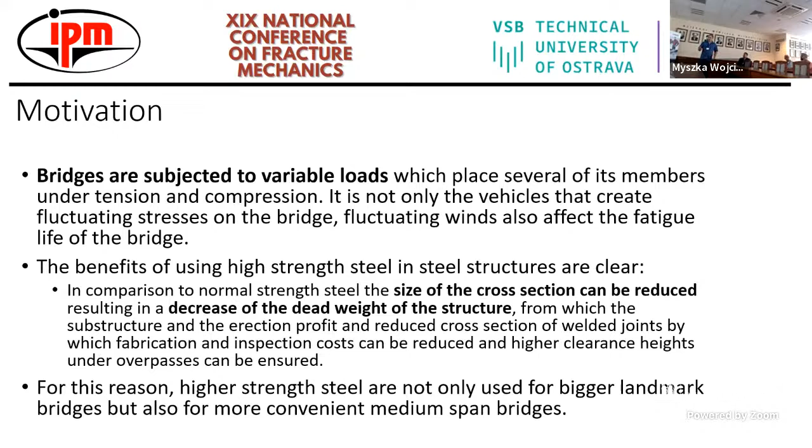If we use both in combination, it means that we need some fatigue measurement, and then we prepare, according to this measurement, some recommendation on how to use this high strength steel. Therefore, our aim is firstly to introduce shortly the material properties, weaker toughness or Vickers hardness, S-N curve, compare and discuss the results, and then later we add some corrosion effect.

One more, please. Should work.

Now, the chemical composition, it is quite easy. It is given by the producer of the steel, and there is some recommendation up to this value of the chemical composition, and there is information about the real values of the chemical composition in this given steel plate. Then you can see here, only for information, how the grain size is. This is 50 microns, meaning it is standard steel structure.

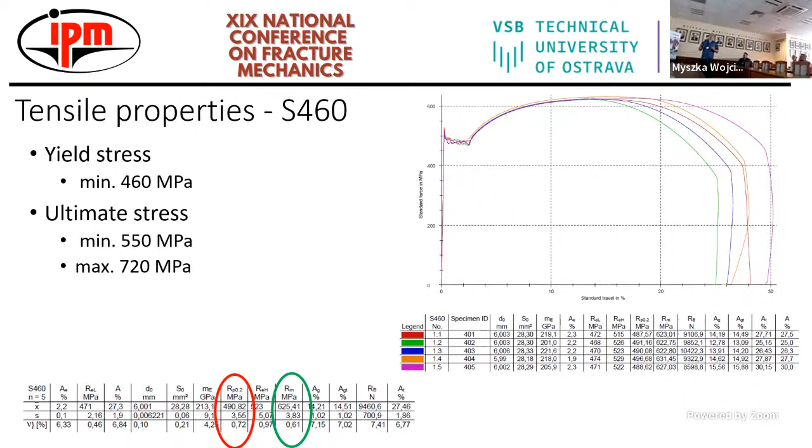Okay, then we move to tensile property. It is according to the norm; we need at least the minimum value of 460. That is the yield stress, and ultimate stress is in this interval. Then you can see the measurement we performed on 5 coupons, and there is information about the average values: 490 and 625. It means that the steel is perfectly in the category of steel 460.

Then the other step was the measurement of the Vickers hardness. This information is important for us because later we are going to weld this steel 460 together, meaning there will be other areas which are not the pure steel, and we try to measure the values around this welded part. The average of the Vickers hardness was 200, and perpendicular to the surface it was 184.

We move to the next step, the information about the SN curves. All our measurements were performed at stress ratio 0.1, which is an important stress ratio for civil engineering structures. The information is very homogeneous, with an index of dispersion of 0.8, and here you can see the specimen which is unbroken at level 220. According to stress ratio 0.1, the limit for cyclic load is approximately 440 or 450.

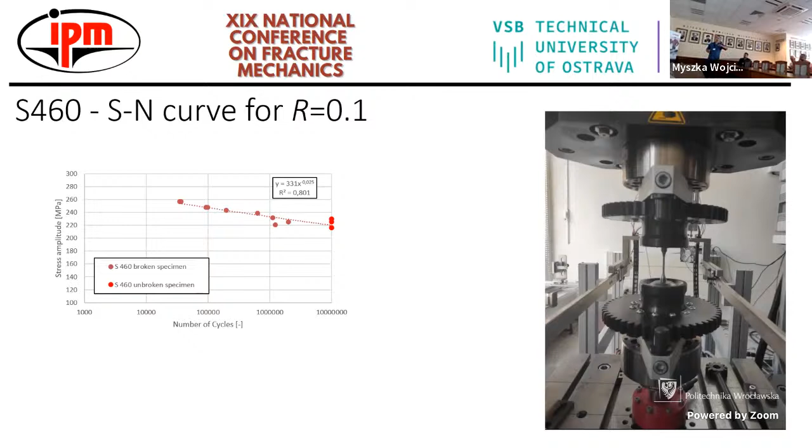Then we move to the specimens prepared from the welded material. You can see the weld given in cross section, and then we cut it. Primary cuts were done in 2 millimeters for the SN curve to obtain information about fatigue resistance, and 10 millimeters was milled and later polished to obtain the net for the Vickers measurement.

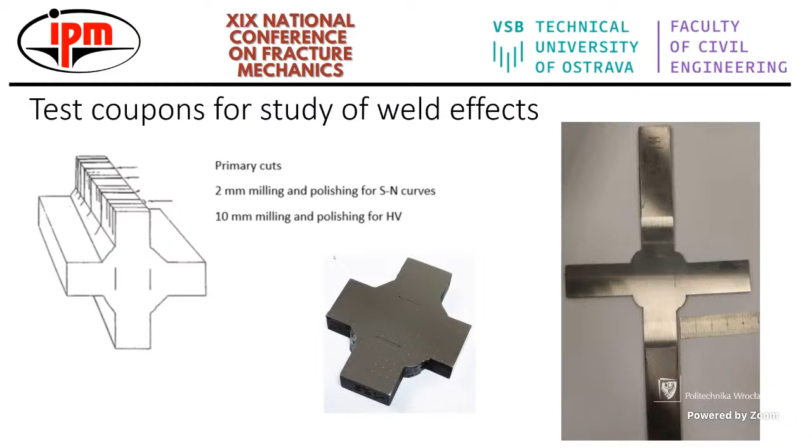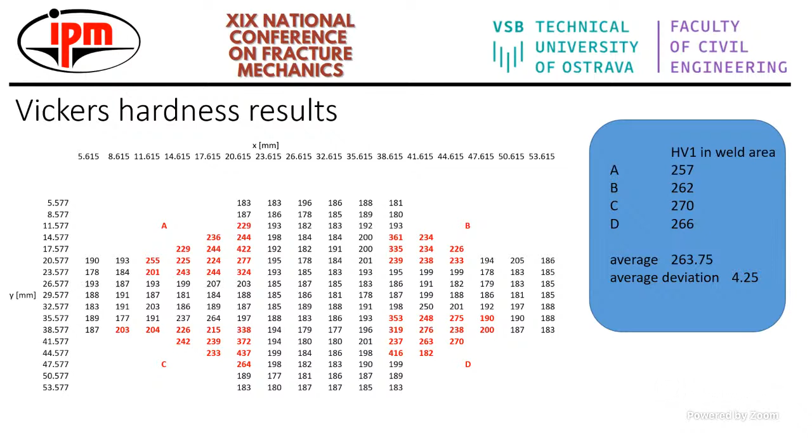Now the net is given here, and you can see these 4 corners from the measurement. I used red color to mark the part of the specimen that was under the weld area, labeled A, B, C, D. From this you obtain the average values in these areas and the overall average value for all welded parts.

Then we move to important results performed on these joints, and now you can see 3 results. The first is well known from the circular specimen. Then we prepared the measurement in the plate, and then the plate with weld joints. Each geometry changes the fatigue behavior of the material.

Especially when we see the endurance limits, which is at 1 × 10⁷ cycles. You can also see that all points, as we approach the static test, are aiming toward point 131.

Before we prepared the test, we looked in the literature to see if this effect is described. We found that it's already best described on the steel BS 4360, and you can see that the pure specimen is really shifted compared to the specimen with the cruciform joints.

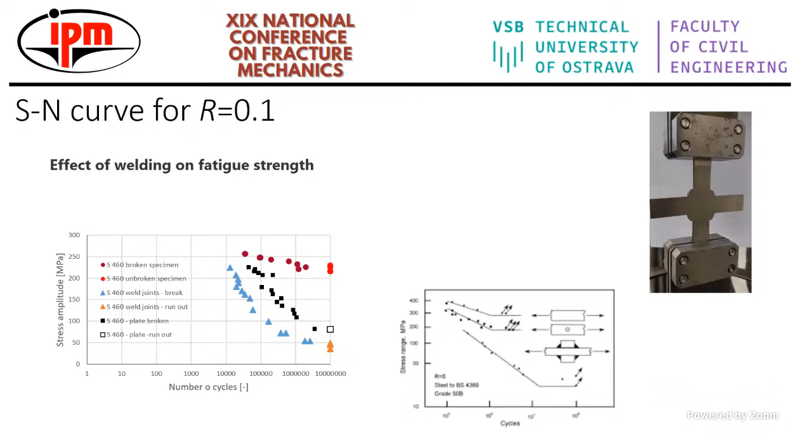Then, as you saw the results, we had to quantify them. The first method is very easy, using the Basquin model, so it wasn't necessary to show it. Theoretically it's good to show it in log scale, but in my case I used log information on the x-axis and the standard semi-logarithmic axis for comparison of the results.

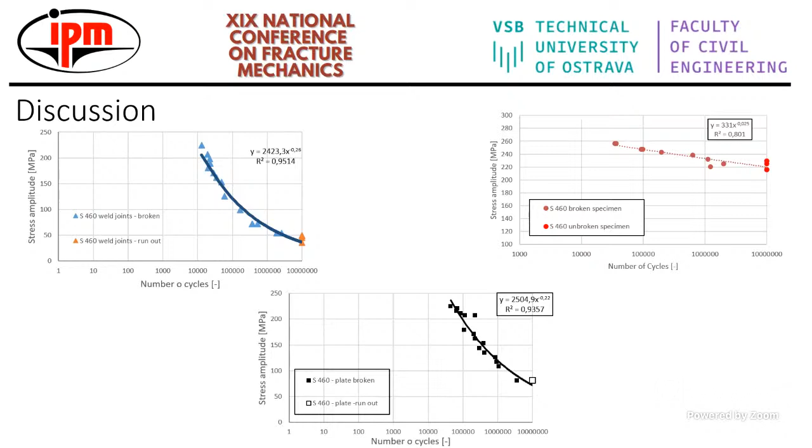You can see that when we use the cruciform or the plate, the index of dispersion is almost better than for the pure material. I suppose this is because it is initiated from the same defect, and also the plate's crack initiates at the surface corner, where the stress is at a higher level than in the middle, where there is no typical stress concentrator.

Then we looked at how crack initiation happened, and we found it occurs as we supposed and as known from the literature, coming from the weld toe. You can see the red rings marking this, always over the weld part.

Then the other step of our research was to control what happens when we expose this steel to corrosion. We prepared the experimental campaign for 3, 6, and formally 9 days — 6 days in the chamber at 45 degrees and 3 days in the chamber at 50 degrees Celsius. The fourth set is from the roof exposure sample, which stayed on the roof for 1 year.

Okay, you can see the chamber for the corrosion, and how we tested these samples. These samples, you can see here, this 5, it is one clear specimen, and each one with a different corrosion effect. Then also for stress ratio 0.1, and then we started the test.

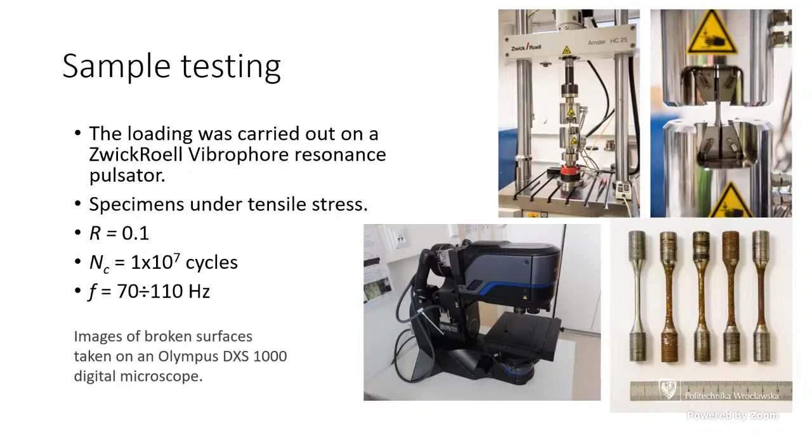After this test, we also used the Basquin model for evaluation, or an extended one, the Castillo-Canteli model, because we would like to know not only the probability of rupture of the specimen at 50%, but at 0.05 or 0.95, and if we are able to calculate the probability of rupture at 0 level.

Okay, you can see the first one. The Basquin model, it is quite clear. Applied, and then the problematic part of the Canteli model is that it is described as hyperbolic, almost hyperbolic.

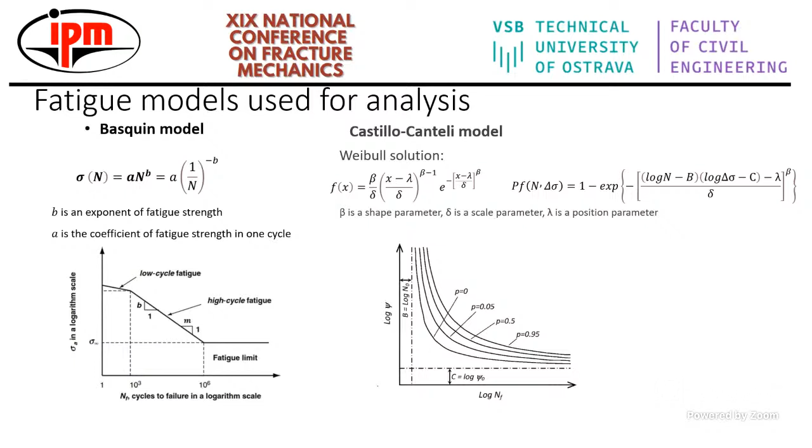This means that according to the rules, we started evaluating for Basquin from 10,000 cycles. Also we need to start for the Castillo-Canteli model. Okay, this is the reference one, and then the comparison of all 4 situations after the exposure in the chamber.

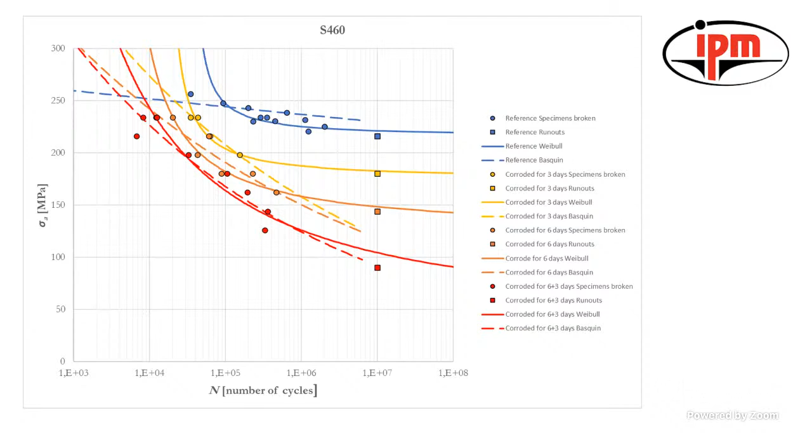Okay, you can see 3 days. Then, as we supposed, 6 days and 9 days. Then we added the corrosion effect after 1 year on the roof.

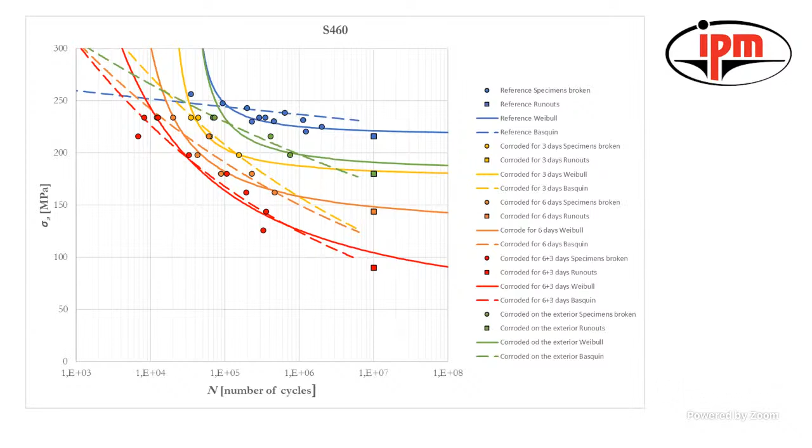You can see that this is between the clear specimen and up to 3 days. It means that if we wanted to simulate the situation in the Czech Republic with the high strength steel corrosion effect, it is clear that we could use 3 days as approximately 1 year of corrosion, or less than 3 days.

Then for 9 days it is 30% down, but here it is 50%. And as we saw before, for the roof it is in this position, the green one. Also you can see there is only 5% or 10% degradation for the endurance limit.

Okay, then we look at what happened on the surface. Because we suppose that the corrosion effect is on the surface, it means the crack surely starts from the surface. As you see, this is the reference one, theoretically without the crack prepared by corrosion. Then from the exterior, because it's the second one, which follows the corrosion.

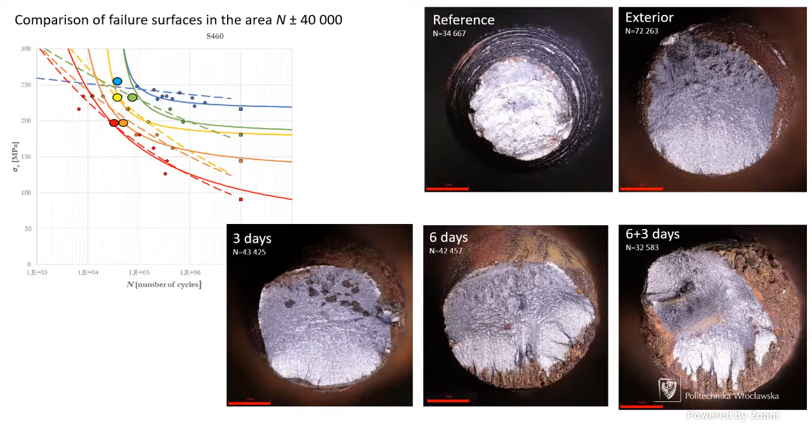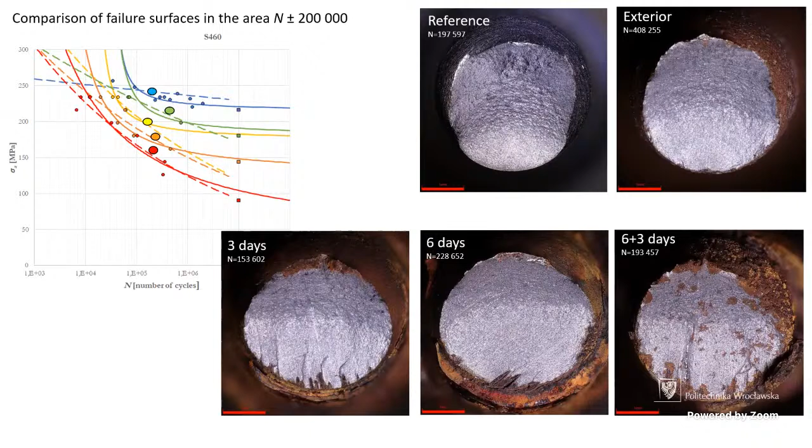And you can see the points taken from this measurement. What is this for 200,000 cycles? Also you see here the crack propagates formally up to brittle rupture, and then you see that the corrosion goes deeper inside during these additional days.

And the last two slides show us the reference one, the exterior, and 6 days at this level, and then for all we try to finally evaluate.

As I showed you before, the degradation in bearing capacity due to corrosion is clearly visible. It is from the results, quite clear. You can see the degradation due to the corrosion, and it is quite clear that the corrosion influences the fatigue properties.

And if we would like to combine this with some welded specimens, it means we have to take together at least 2 effects, one for corrosion and one for weld. And surely the properties will be, I suppose, the third one.

But we just prepared the specimen. You can see one of them for the testing, but we didn't test it yet.

But I think that it is the last one, which we are going to prepare during 1 month, and we will finish all our experimental campaign for this high strength steel S460, and we will be able to quantify not only the effect of the weld, but also the effect of the weld together with the effect of the corrosion.

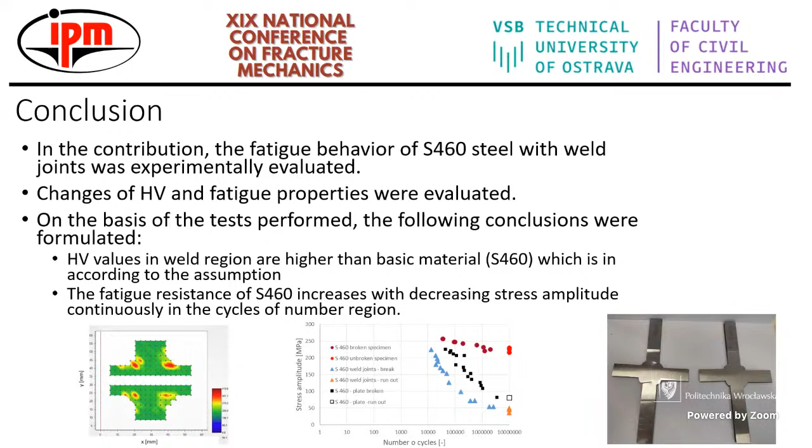It is a very difficult question, but thank you for this. I think for quantification, because you never know how long the bridge is influenced by corrosion... as you see here, after we apply the corrosion effect, we try 3, 6, and 9 days, and you can see it will affect, especially the endurance limit. We surely try to find some advanced description of how the properties change due to corrosion, and we try to use some function to predict in the future how it changes the properties.

But is it better to measure the properties after 3 days? We also know that when we take it out, we immediately start the measurement, so it's not exactly 3 days, because if we perform the test a month later, surely the corrosion effect continues inside. So if you do it during this corrosion effect, I don't know what the added value will be.

If you wanted to look at when the crack will be better, for example if some oxidative crack could be more quick or retard, or generally speaking in propagation - there is not this effect case, because we suppose that using this, only initiation is enough.

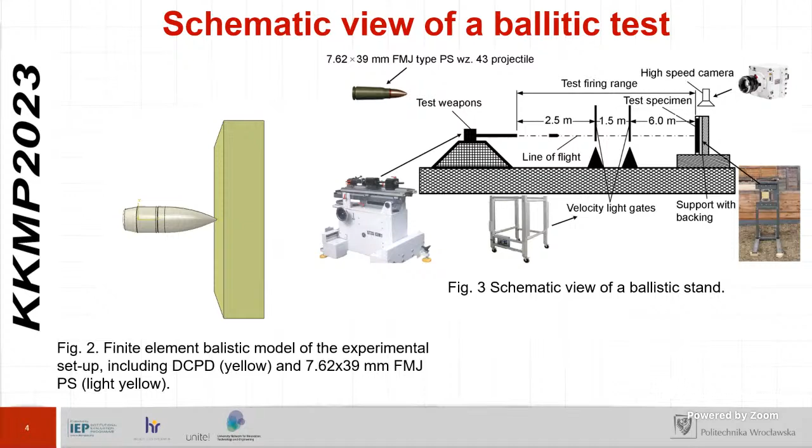This bullet is made of 3 components: the core, the filler, and the jacket. The jacket is made of brass, the filler is made of lead, and the core is made of steel material. So if we have a core made of steel versus one made of lead, you can expect the damage the steel core causes compared with the lead one. The damage from the steel core is so huge, and that's why I'm considering this one instead of lead, even though my PhD covers both. But for this presentation today, it's strictly steel core.

This is a pictorial view of a DCPD plate that is 5 millimeters. For my research, I consider 50 by 50 millimeter samples made of DCPD, and I consider different thicknesses like 5, 10, and 8 millimeters.

After quasi-static tests, I was able to come up with this constitutive model - the material properties of this DCPD from the Young's modulus to the fracture strain, and this is detailed in the table.

From the test, here is the pictorial view of the test in the laboratory, and here is the 3-point bending test result showing force versus displacement. For the stress-strain information, we have it here, and the fracture strain is about 0.035.

This fracture strain is crucial for me - it's very important information because I need it for the numerical calculation, especially to see how this material actually fractures and turns into particles, like the first lecture we had in the morning about smoothed particle hydrodynamics. It was also considered here.

Before we move forward, let's briefly look at this SEM analysis of the bullet. From this portion that was chosen here, which is the steel core, it looks like this. This is just a slice of the bullet, so when you slice it, you're able to see the core, the filler, and the jacket. Here is the core, the next layer is the lead filler, and this is the jacket.

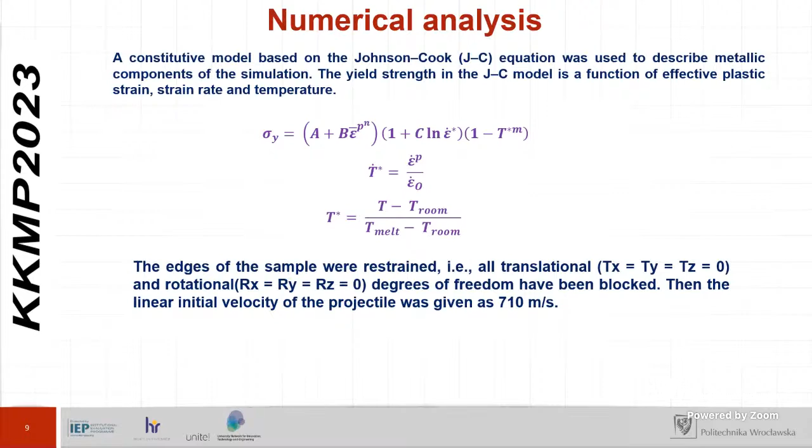I'm going to show you how it actually affects that. So, description of the bullets used for the simulation: we have to check the constitutive model for the bullet itself. This is the steel core, with parameters A, B, M, and N, because we need this information for our numerical calculations. For the lead filler we have this, and for the brass jacket we have this information. This is just the pictorial view showing the outside jacket layer, the filler, and the core, and this is the discretization of the whole bullet.

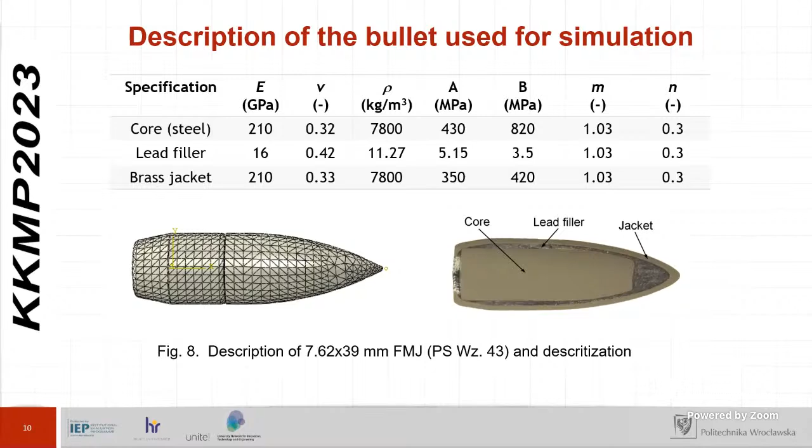Now for the resulting discussion, we can see a complete penetration. This sample, a 5 millimeter thick DCPD plate, is unable to stop this bullet. There was complete penetration, and you can see the material fractured here, with particles visible.

We set this up using the stress-strain information, because we have the fracture strain, so we used the condition of the fracture strain so that whenever it gets to that point, we get this kind of information. This is what it looks like in real life when you shoot it.

So there's full penetration with these bullets at this thickness. This is the side view, and this is the front view, showing the von Mises stress information. For the second sample, which is 10 millimeter DCPD, the same thing happened.

However, there is a difference in the size of the damage, the size of the penetration. That's the only difference we observe here. Of course there's complete penetration, which doesn't mean this result is bad; this is what we actually expected, because no one expects a DCPD material to resist that kind of bullet with that impact velocity.

For the bullet itself, it's important to show how the velocity drops with time. The flat region is when the bullet is in the air and has not touched the sample yet. By the time it touched the sample, you can see how the velocity drops until here. In the relationship between velocity and time, when the velocity actually gets to zero, it means the bullet stops - that's the implication. But you can see it's not up to zero here, it's just from 710 up to somewhere around 706. So it means the bullet was still going, but we don't need that information. The information we need is there was a complete penetration, and that's why this velocity drop does not get up to zero level.

And for the kinetic energy of the bullets, it has to look similar, giving us information about the velocity, since there's a direct relationship between the kinetic energy of the bullet and the velocity itself. So the kinetic energy also drops. It starts dropping from the point at which we have contact of the bullet and the sample. It doesn't get to zero, because you start from 1990, a bit more, and the energy of this kind of bullet is about 2,100 joules. But because I used 710 meters per second velocity, I have this. If I use the real impact velocity of this bullet, which is about 730, then by calculation I should have 2,100 joules. So the energy drops until it gets to this place. The implication is, even though this material was not able to resist or stop this bullet, it was able to absorb at least a little of it, and some part was even transferred back to the bullet. So this is what we can see here on this plot.

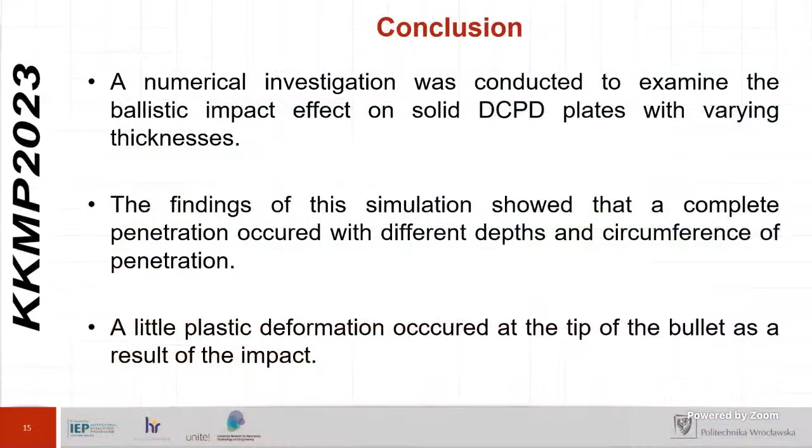Slide number 6, you have the Young modulus is 2.1 gigapascal - is this the Young modulus for the polymer? I think it should be megapascal. Gigapascal? It says 2.1. 2.1 of the polymer, this is DCPD? The Young modulus, yes. This is the Young modulus for this. This is DCPD material? Yes. Just pressed with a very low Young modulus. Yeah, it is low. Yeah. Right, that was it. Thank you. Another question, please.

Actually, I would be interested in what will be the benefit of using DCPD instead of, for instance, epoxy. That would be the first question. And the second one, did you apply any failure criteria for FEA?

Okay, thank you for your question. I'll start from the first one: why do we consider this? Like I mentioned in the introduction, this DCPD has never been used, so technically we might be the first to put it on the internet. This is the essence of research, we have to keep finding new things. Another point is from the published work we published a few weeks ago, we actually used this DCPD, and the results show a very good outcome when it comes to ballistic material, especially for the matrix system, far beyond epoxy resin. It was really, really better results. If you don't mind, I can show you this paper and you'll definitely appreciate it.

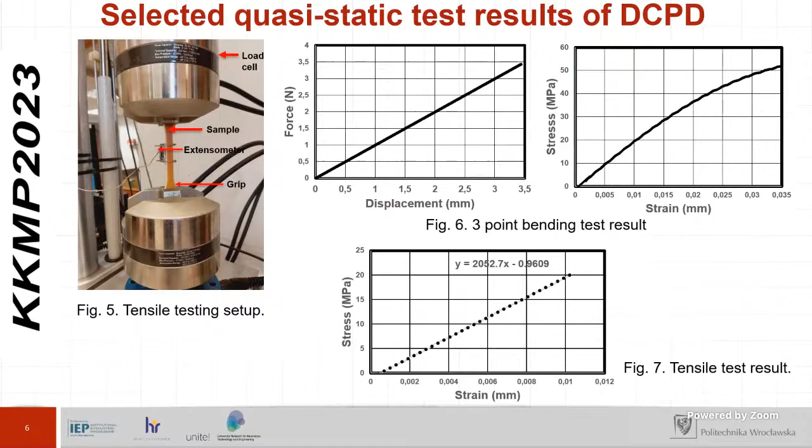Yeah, but you show the failure strain for statics. For static, yes, but you have a dynamic situation. Dynamics is really a complex thing, and sometimes you have to justify the results by considering what we have from quasi-static tests. If we can get the constitutive models from the static results, we can think how this material would behave, even though the conditions aren't really static. But certainly the strain would be lower when it comes to dynamics. How much, I don't know. Maybe it's something I would like to check in the future.

Okay, thank you, thank you very much. More questions? One more, please, Mr. Seidel. Okay.

Okay, Professor. This one? Good. Yeah. Less than one? Yeah.

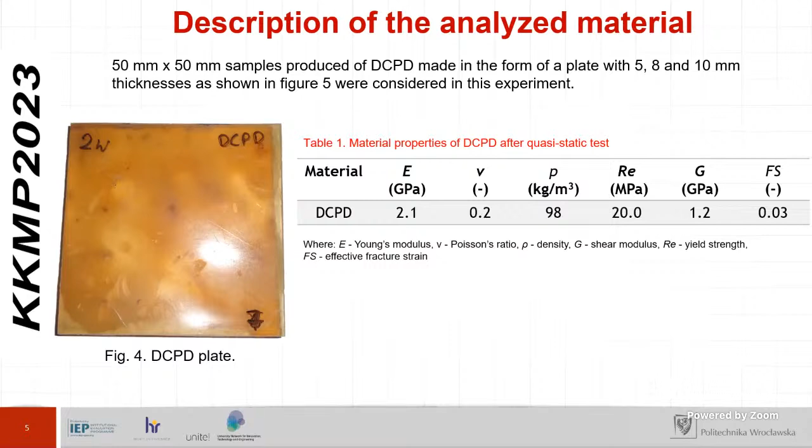Next presentation is again from Wrocław, with several co-authors, Dr. Bem, Kluger, Osiecki, Schubert, and Banasciuti. It's from Opole University. Opole, thank you. Thank you, all of them? Oh yeah, I'm sorry, no, we have cooperation with 3 universities on this paper.

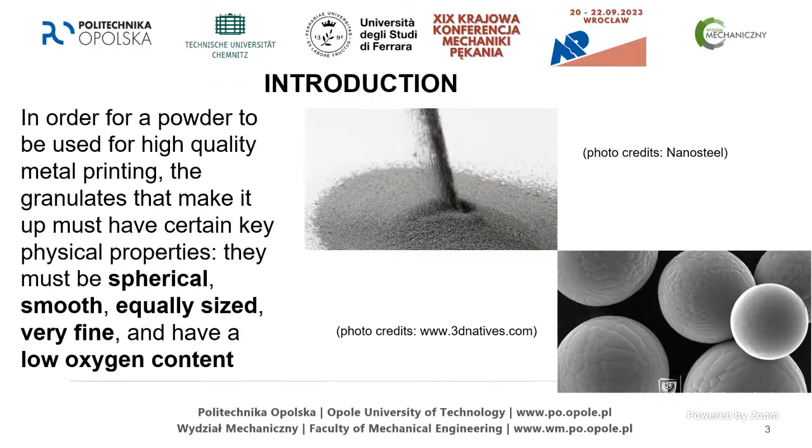We don't want the powder to be trapped inside the element while printing complicated shapes during the process. That is why we need to remove it before closing gaps or voids, as you can see in this picture. So powder removal is actually one of additive manufacturing's dirty secrets, right?

We have many techniques. We don't want to have the powder anywhere. We have vacuum, boiling, we have some ultrasonic techniques which we can apply in order to remove the powder from complicated shapes, spaces, and so on.

So in one of our meetings, because we are printing a lot of things together, we actually discussed... it doesn't do anything.

What will happen if we don't remove the powder during the printing process and leave it in the voids, right? I'm not talking about the pores, I'm talking about voids - the spaces that have been created according to some complicated structures and so on.

There have been some papers on fatigue in terms of powder contamination of the structure of the samples, of the influence of different pores. But what happens if we just leave this inside the void? How would this influence the fatigue properties of a printed element?

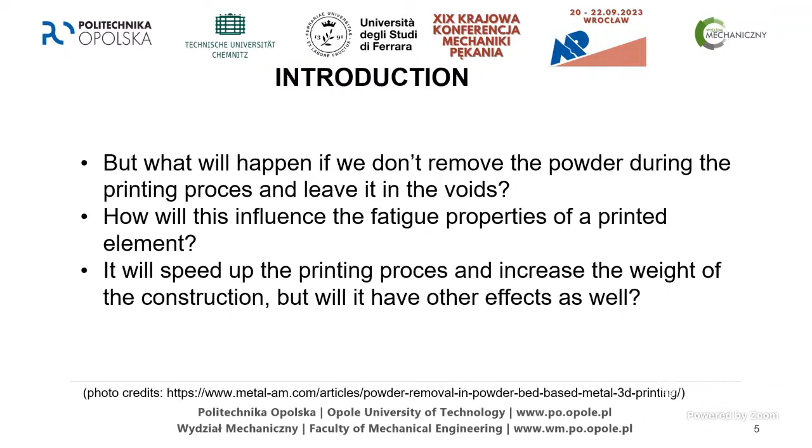It will speed up the printing process because we don't have to stop the process. We don't have to blow out the powder, right? And it will increase the weight of the construction, but will it have other effects as well.

So in order to try to answer these questions, the authors have performed experimental fatigue tests of 3D printed specimens. The goal of this paper is to test fatigue specimens with powder trapped inside a pre-designed void, in the shape of a sphere, under constant amplitude bending.

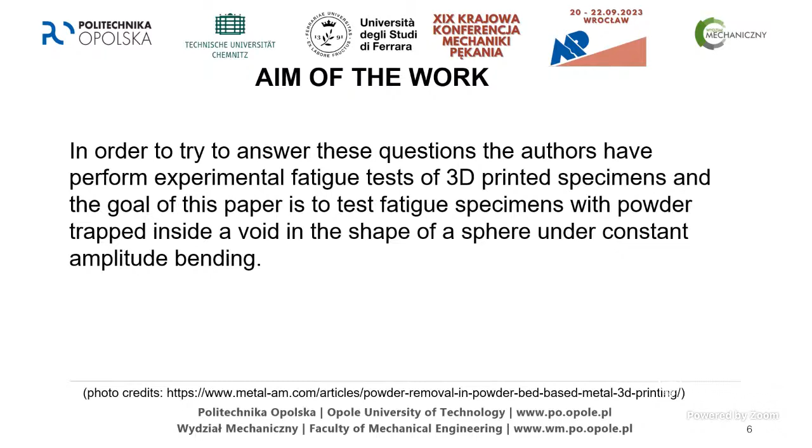So we designed a 3D model, we designed a sphere, but whether it's going to be a sphere or not we will see after the printing process, because the printer also has its own capabilities.

So the material that we have chosen for this is titanium - aluminium, vanadium, grade 5. It is comprised of 90% titanium, 6% aluminium, and 4% vanadium. The positive aspects of this material are its high corrosion resistance, high tensile strength, light weight, low density, heat treatability, easy weldability and fabricability, and excellent biocompatibility. It's non-magnetic. It has some disadvantages as well, such as poor shear strength and being corrosive to strong acids.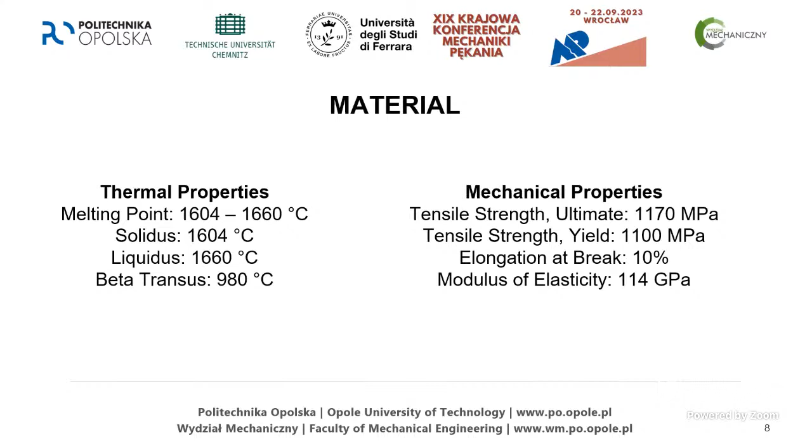The mechanical properties - we can see high ultimate strength, tensile strength, yield, elongation at break - and the modulus of elasticity is not bad for a material like this.

The samples, or specimens, that we have used - as you can see, the upper one on the left is the full fatigue specimen that we normally use for fatigue tests at the Opole University of Technology. It is called the Diabolo specimen. On the right side we have the tensile specimen that was used, which our partners wanted to use during the test. And on the lower left corner we have the fatigue specimen with the spheric void.

So we actually have two types of fatigue specimens in doing these tests: we are testing the full fatigue specimens printed, with no voids inside, and we have the fatigue specimens with the spheric void inside that is filled up with the powder. We are not stopping the process, we are not blowing out the powder, we are just leaving it there. We want to see how it will influence the fatigue properties. And the fatigue properties, in my aspect, we want to check up to the moment where we have the initiation of the crack - we are not discussing the propagation of the crack in this paper.

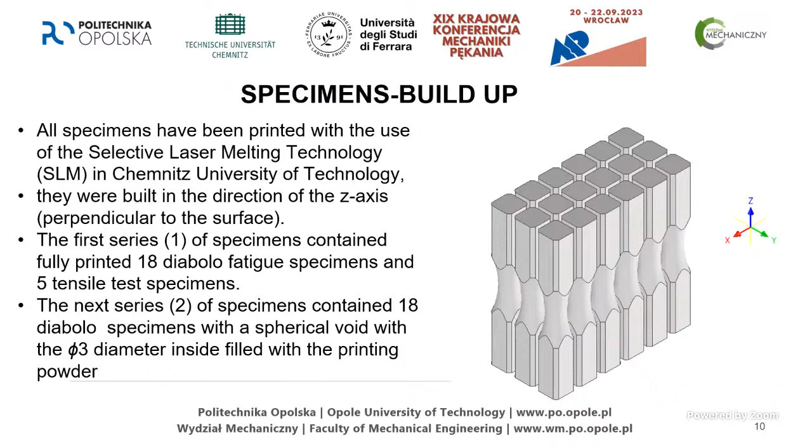So as for the buildup, we had two sets of fatigue specimens and one set of tensile specimens. In the first round, all of these tests have been built - the specimens have been built in the direction of the z-axis, as you can see on the right side. The diameter was 3 for the spherical void specimens. This is how we got the specimens from our partner from Chemnitz.

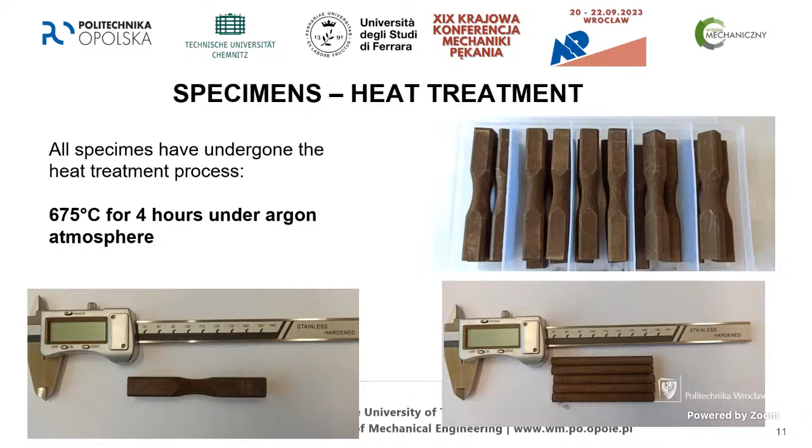The specimens have also been heat treated at 675 degrees Celsius for 4 hours under argon atmosphere, and then we have also machined them, because we want to highlight the aspect - if there is one to be found - when it comes to the void. Normally we could test the samples as they have been printed, but usually there are too many disadvantages in terms of the roughness of the surface, so it wouldn't show a clear result in these terms. So we have machined the specimens, and we have also machined the specimens for the tensile tests.

It's good that we have the company Lenso, and in a few days there's going to be ZEISS. We used their software during the test because we also performed tomography of all of our samples, using GOM Inspect Pro for that purpose. It's interesting that we met up here.

We could calculate the whole area, all the pores that have been inside the specimens. We have all the data that can be later analyzed. We can create 3D models for the finite element method and so on. So we have all the data. The perfect situation would be like this.

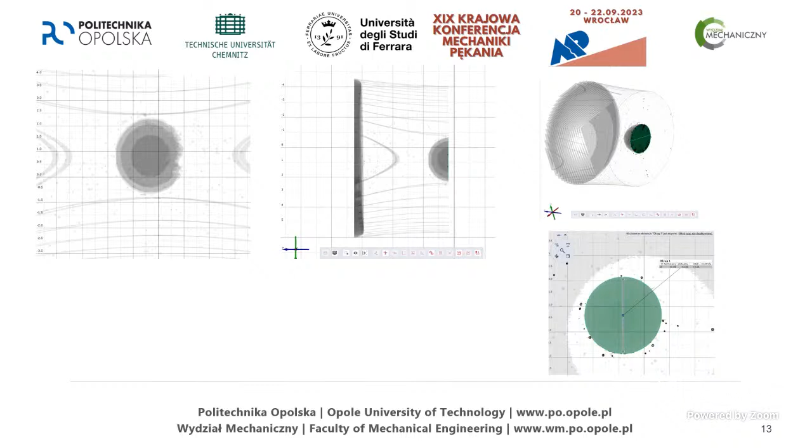If we have the scan of our void like this, nothing beside it - but in some of our specimens we have something like an artifact, presumably caused by a computer failure or something during the printing process. We also measured that area. As you can see, it's enlarged on the right side. We measured it - it's something like a ring element, a little bit coney, like a cone being cut. In some specimens we have this area that may later influence the fatigue tests, as we can assume.

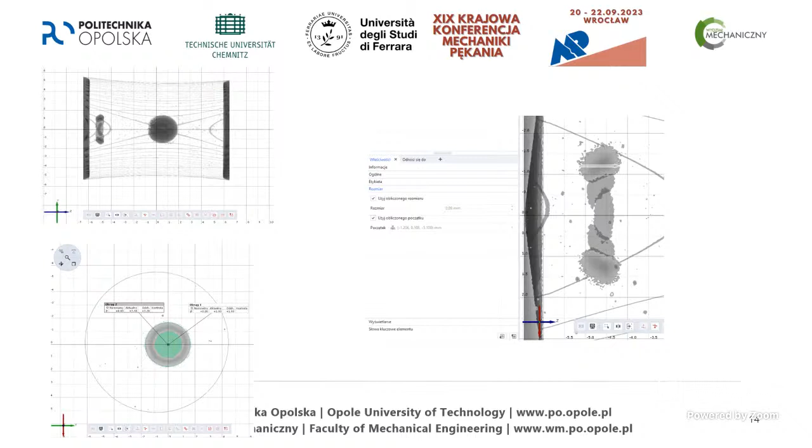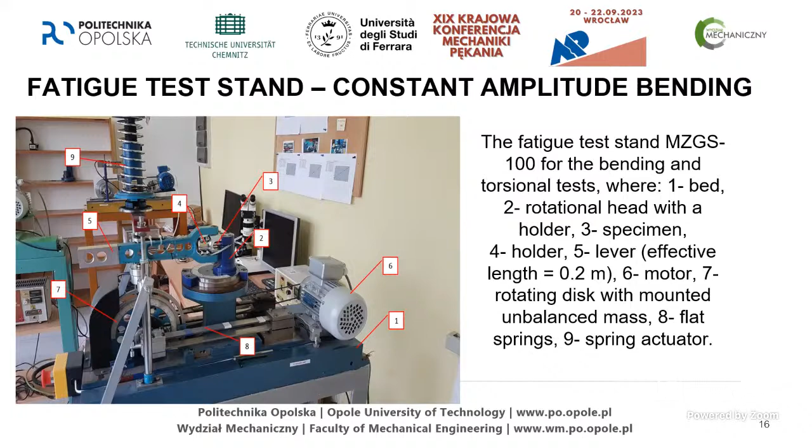For the fatigue tests, we obtained the ultimate strength at 1,164 megapascals. The yield strength is 704. The Young's modulus is 110. For the fatigue tests, we used one of our constant amplitude bending test stands, the test stand MZGS 100 for bending and torsional tests, which allows constant amplitude testing at higher frequencies up to almost 30 hertz.

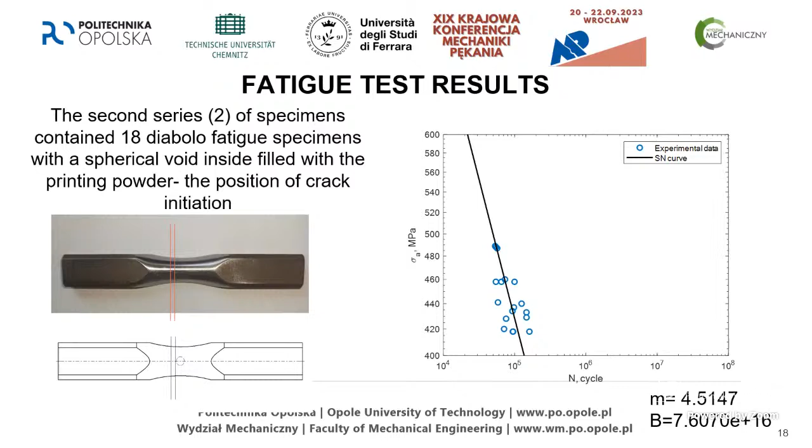Beside this, we also have the fatigue curve for the specimens with the void inside. As you can notice in this picture, the crack didn't occur in the center, but as you can see by the red lines, it occurred a little bit to the side of the void. It appeared every time around this area, never in the center where we presumed the weakest area would be, because there is this void - it's filled with powder, but it's still a void. This should be the weakest area.

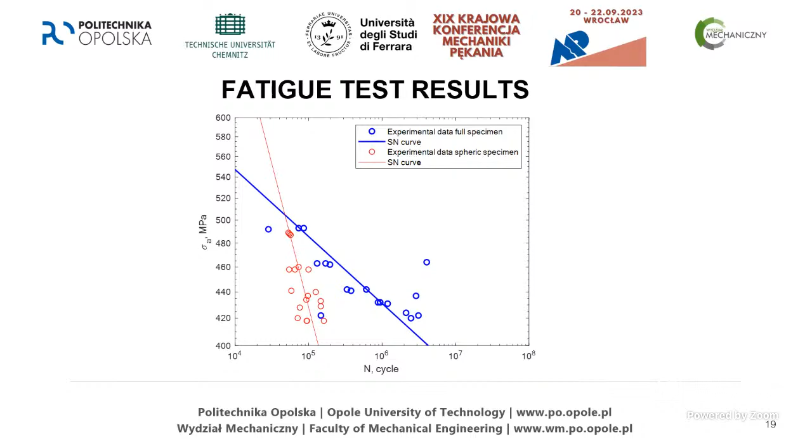Beside this, we also performed a cross section of the whole sample. First we cut it through. You might expect there's nothing there, that our partners didn't leave the powder inside, but as the scans proved, it was also there. It went outside after we cut it through.

This is the surface that you can see with the use of specialized software. The machine is called SensoFar, and this is used to calculate the height, the roughness of surfaces, to measure areas, and so on.

As you can see in this specimen, there was also no - maybe you cannot see it because I didn't highlight it - but in the area where we had those artifacts, we don't see any effect. So there's no additional element where during a CT scan we would have this area that was there on the image. Maybe while we were cutting this it was melted or something else happened, but we cannot see it after the cross-section cut.

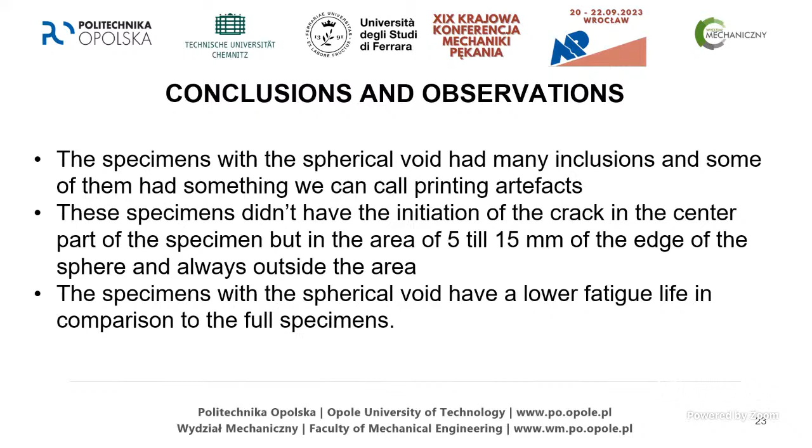The specimens with the spherical void have a lower fatigue life compared to the full specimens, as expected.

Additional fatigue tests should be performed, especially under torsional loading, variable amplitude loading, and in other printing directions, since we printed these in the z-axis direction. Maybe we should also apply 45 degrees in both axes, in the x or y direction. These tests might look different.

The results will be helpful in planning the printing strategy. The authors plan to perform fatigue tests for different void shapes and prepare a catalog of void shape influence for trapped powder. This is our goal. We are planning a grant application for this, because I'm only showing experimental research here, but we are also working on finite element method calculations for these cases.

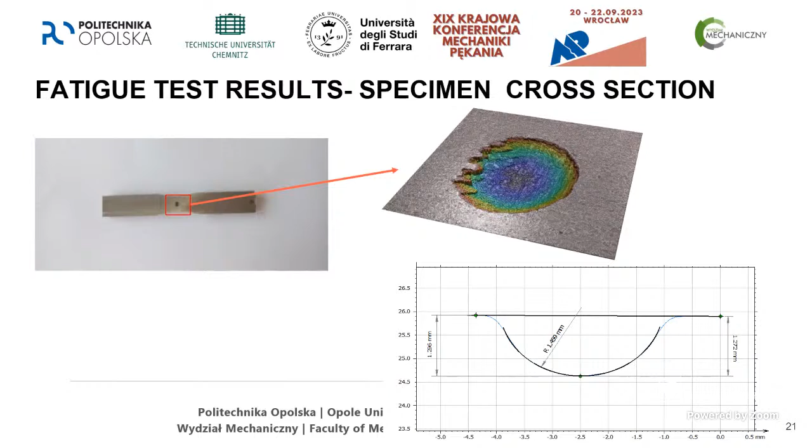As you can imagine, regarding how the powder is trapped inside and the effects, we have a little more information. As you can see here, there's something like a leftover on the left side of this sphere, this circle. Maybe this was a leftover, something they call a lattice, during the printing process. Maybe it also appeared during the heat treatment process—also possible, but it shouldn't really happen for this material due to the temperature.

Okay, do I have some additional time or not yet? Because I had some other pictures—2 to 3 minutes, 2 minutes, okay.

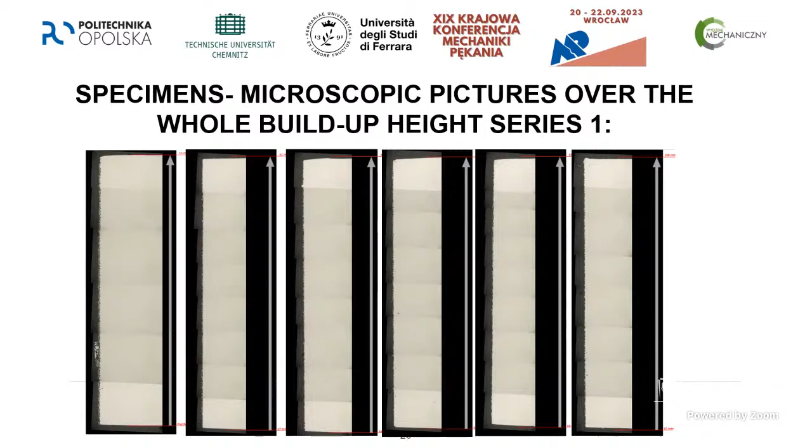Besides this, our partners, who printed it in Chemnitz, also gave us information from microscopic pictures of the whole build. For the full samples, we had almost no pores in the specimens—almost perfect. In the second case, I chose some pictures where there were more pores across the whole printing process.

This could also influence why we didn't get cracks exactly in the middle, but it shouldn't be the case for all specimens—yet this happened for all specimens.

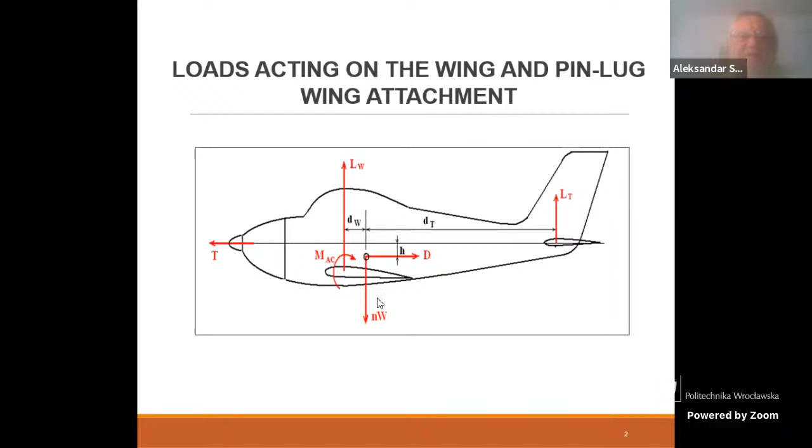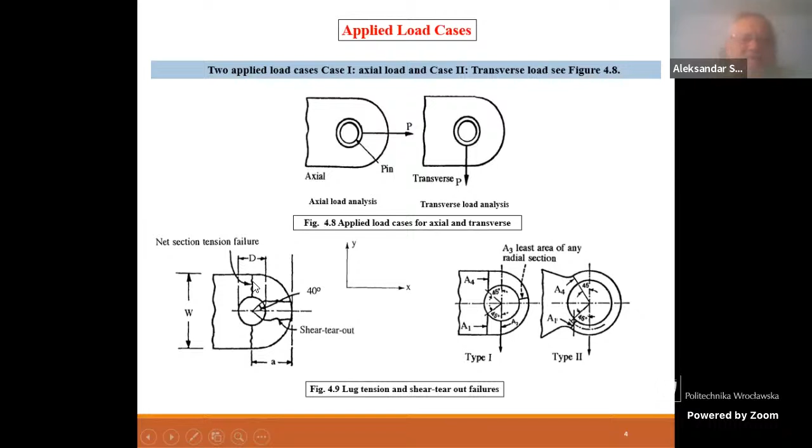Here we have some details which we should take into account and explain a bit. Those are the connection points in the fitting of this main spar, which actually holds the wing. It is a kind of beam, relatively simple from a mechanical engineering and stress analysis point of view, but still what is critical here is this lug, which is under tension and also under transverse load, so some shear as well. There are many cases of failure, or at least cracking—cracking is typical, not exactly failure, because there are ways to prevent it, but it could also be a failure from time to time. You can see here where cracks would typically occur, and this was the topic of our analysis.

We started with a static analysis focused on the lug part. You can see the basic dimensions here, including the outer radius and inner radii, which are important for the analysis that follows. Thickness is 12, which is important because we will vary thickness in the last part of this presentation to get the optimal value, as well as these radii.

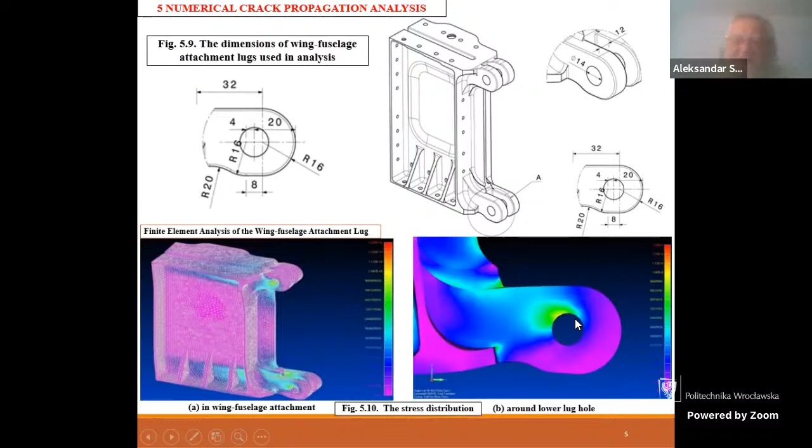Static finite element analysis indicated the most stressed region. Our finite element model for the fatigue crack growth analysis was based on this static analysis. You can see a sketch of the model, and where we put the initial crack, exactly at the location where the static stress was highest. That is standard engineering analysis.

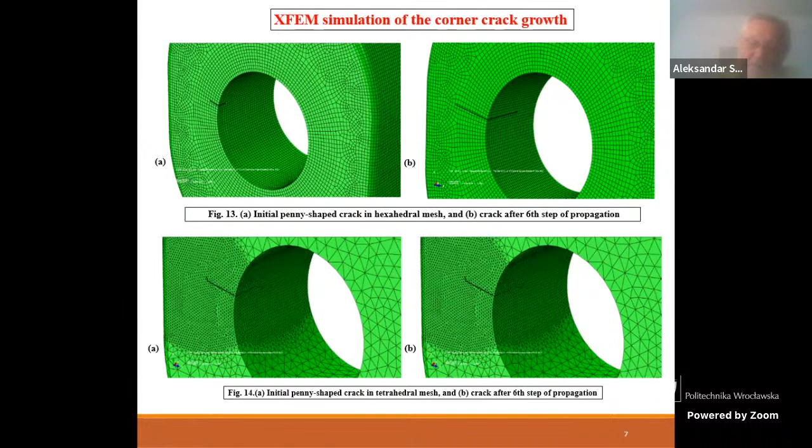A few results to show you about the stress intensity factor. It is a three-dimensional analysis, but still mode 1 is dominant, as you can see from these results, because K1 is similar in value to K equivalent.

You can also compare - sorry, it's not completely visible, I don't know how to remove this, it goes away on its own from time to time. Now you can see the complete slide. You can see that stress intensity factors are in relatively good agreement.

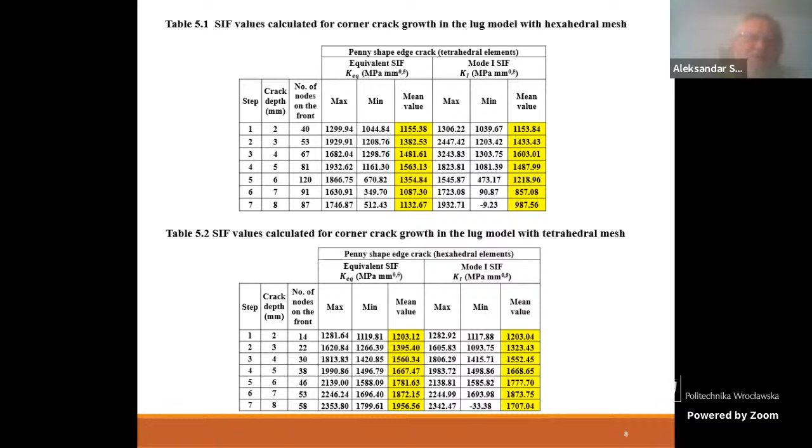In any case, tetrahedral mesh produced higher values of stress intensity factors, and therefore tetrahedral elements produced shorter lives. In this slide, crack depth is dependent on number of cycles, and you can see relatively good agreement between these two meshes.

You can see that tetrahedral elements produced a more conservative result. I will not go into much detail about which one is better - at this point we don't have time, and to be honest we don't have a decisive conclusion, because unfortunately we don't have experiments to verify this numerical simulation. So I will just state which one produces more conservative results, but we still don't know which would be better. We plan to do more experiments in the future - we already did some, but not verifying these results, just static results.

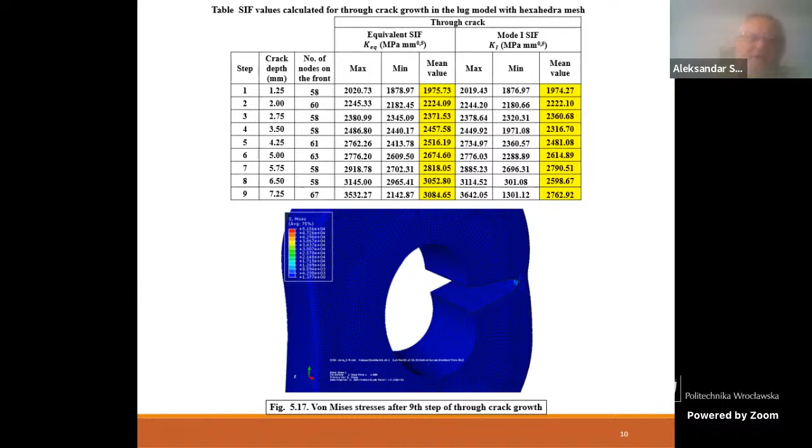Numerical results are shown also in this table, indicating stress intensity factors, and then von Mises stresses are shown in the figure below.

Now, improved FEM analysis is presented here to show you some differences between numerical simulation by XFEM done in Abaqus that I showed so far, and numerical analysis of fatigue crack growth done by ANSYS using the classical finite element method. That means using a special technique to reconstruct the mesh at every crack step, but not done by us - that's what ANSYS does on its own. That technique is called the SMART technique, but that's an acronym, not an adjective.

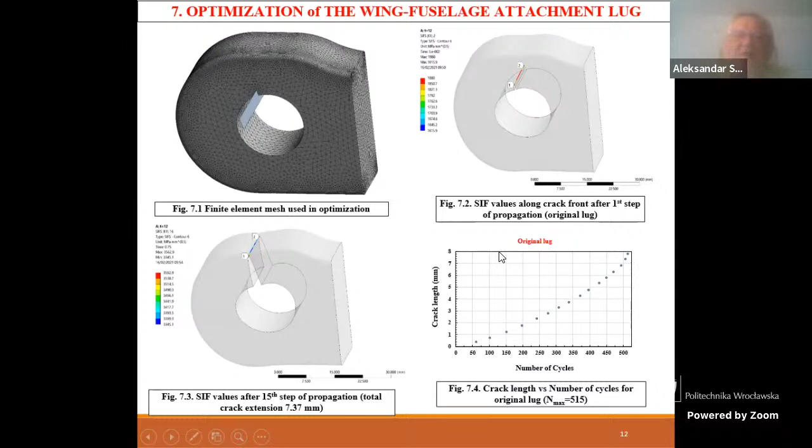There were a couple of models used for this. This one is the original model, so it is 515 - that's the number of cycles for the crack to grow from 0.5 millimeter to the critical value. This is almost the whole cross section.

Then we made another model where we varied, or better to say increased, the thickness. By increasing thickness we would add some mass, but we would reduce the stress intensity factors, so in a very natural way we would get a larger number of cycles. Here it is, almost double - 1085 compared to 515, actually more than double.

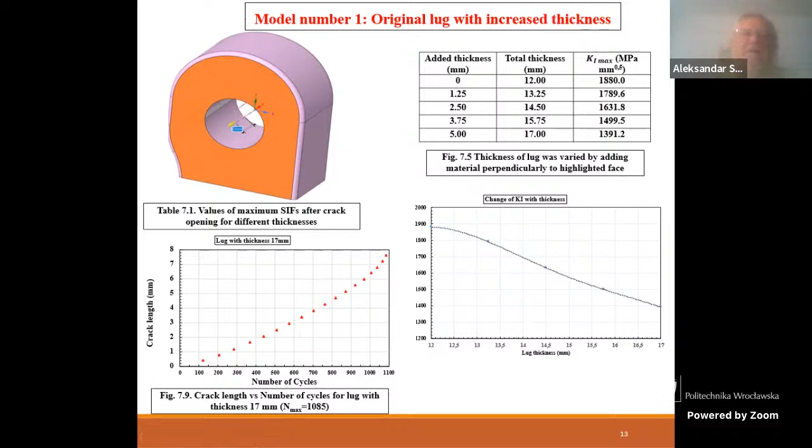That's really simple, but more complicated was what follows, model number 2. At the same time we varied thickness and inner radius, so by doing so we have a 2-parameter optimization.

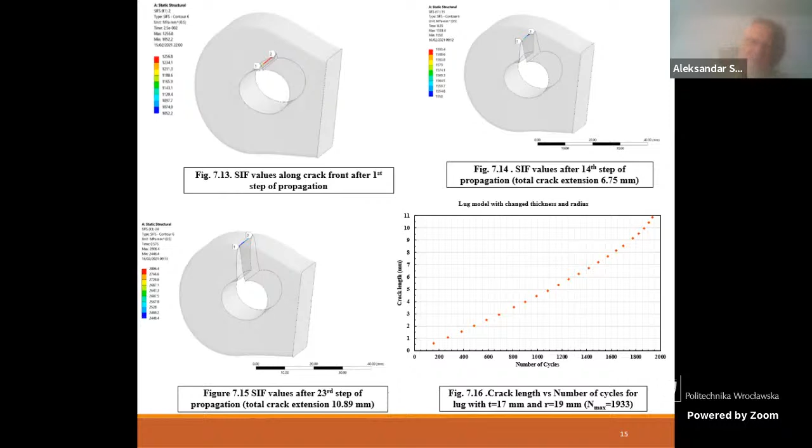After analyzing these results, we came up with yet another number of cycles - in this case 1933. So almost, once again, almost doubled compared to the previous option, and almost 4 times compared with the initial one.

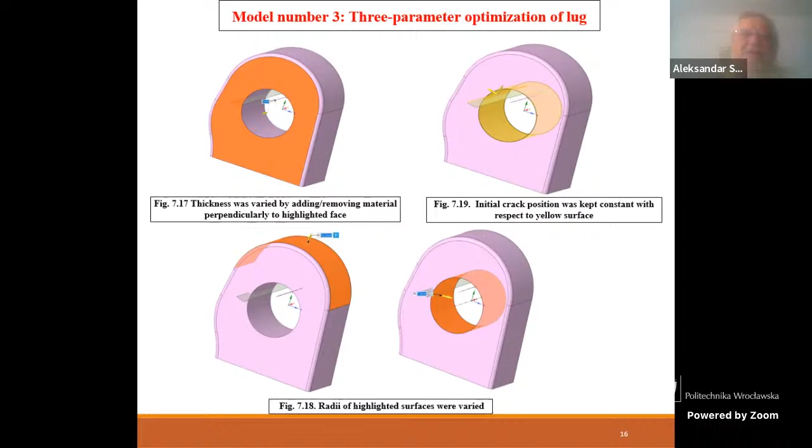And then another two models, now with 3-parameter optimization - not only thickness and inner radius but also outer radius. Just to show you a couple of results, the optimal combination in this case would produce a number of cycles in between the previously stated values, so something around 1000. And the last one similarly, around 824.

To make a comparison of all of them, you can see that by far the best from the point of view of number of cycles is that 2-parameter optimization, which was close to 2000. Here it is a bit less because crack length is limited to 7 millimeters. You may notice that the original lug has the shortest life, and the others are in between.

This table shows about the same. You can see here, even in percentage, what is the increase in number of cycles, but you can also see that at the same time the mass increase is highest where the number of cycles is best.

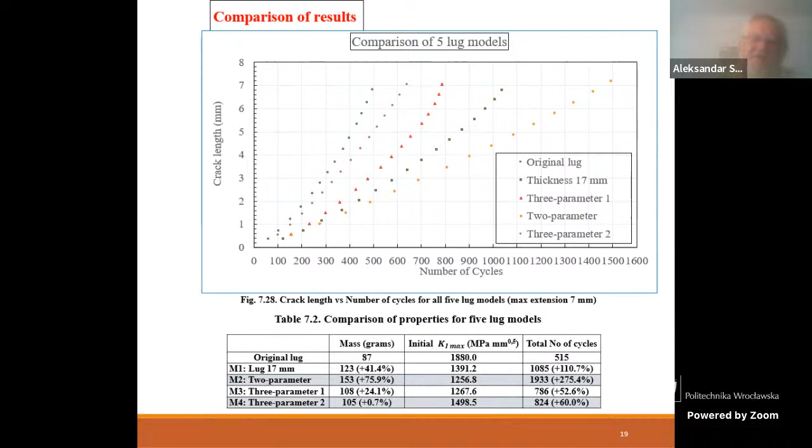To conclude, you saw what numerical simulation can do, and we can conclude that model 2 is the best from the point of view of number of cycles, but not from the point of view of mass. So if number of cycles is the only criterion, we choose model number 2. If not, we might choose maybe model number 4. In any case, this is a bit of a play, so we still need to experimentally verify this before we can really apply it in real life.

So here we go. Slideshow mode. Couple more authors are listed here, but basically this simulation was done by Simon. By the way, he is right now in Dubrovnik for an international conference on durability and integrity of structures, presenting papers like these two. He is one member of our team, working very closely with Grbovic. So let me get rid of this if possible. No, I can't do that. I hope it will vanish on its own.

So here we are dealing with hip implants. In this case, we have used titanium alloy, and our main goal was to analyze the effect of a very harsh environment for hip implants, because the human body is a very unpleasant environment for metals. So we did it experimentally and numerically, and we were focused on two effects: one was moisture, a humid environment, and the other was a salty environment. In both cases we used special chambers for the experiments.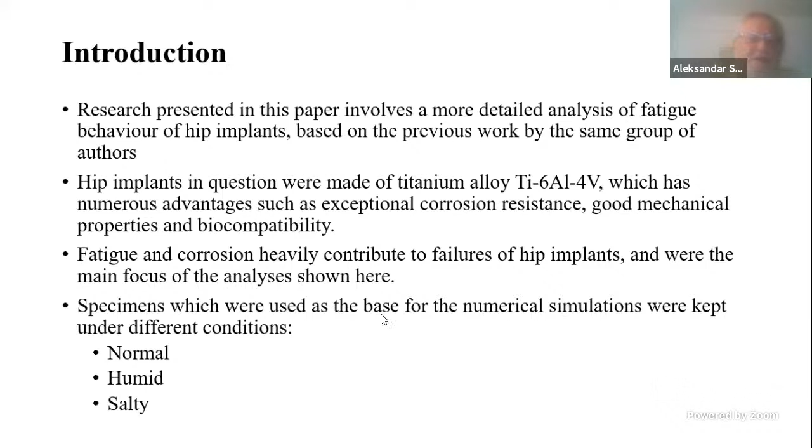And I still can't get rid of this bar. Oh, okay, this is slightly better. Yeah, now it's good.

So as for the introduction, I think I mentioned most of the important facts. Let me just say, and you will see it soon, that we did have a problem with fracture toughness testing, because we had only 2.2 millimeters thickness of plates. So we couldn't get K1C, but anyhow, the basic idea here was to compare. And from previous experience, we also knew what value K1C would really have.

So we decided to go on with KQ as a relative measure for these three states, and use it to calculate and evaluate critical crack length. That would not be in the plane strain condition, but still it would be in a kind of real condition, more or less. Then again, the other differences for these three states would be in Paris coefficients, as mentioned here.

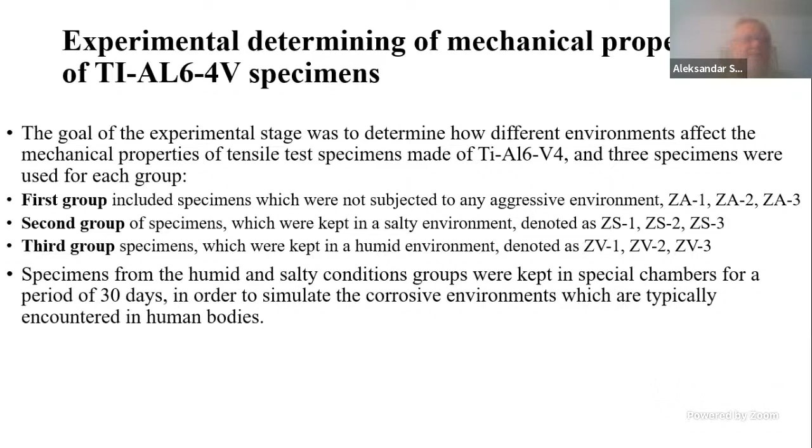So here you can see these specimens. CT specimens were used for KQ and of course for Paris law coefficients. At the same time, we also tested tensile specimens to see the effect of the human body on tensile properties. Here at the bottom, there is text explaining what I just told you about KQ versus K1C.

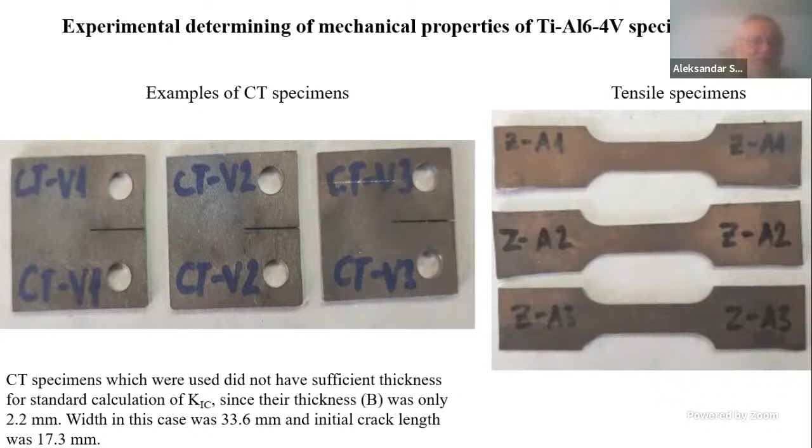So we covered that. Now you can see the results for stress-strain diagrams, and you can see that about 7-8% reduction of yield strength, less than 10%, is typical for salty conditions and almost the same for humid conditions. But the salty condition, as you will see, is also the worst case for fracture mechanics parameters.

Here you have a list of these 3x3 experiments. We had 3 specimens for each condition. In red, I marked 2 specimens that were a bit surprising, especially for normal conditions. One will expect more uniform results, but you can see that yield strength was not exactly uniform. Tensile strength was. Nothing special about it, just to pay attention to that.

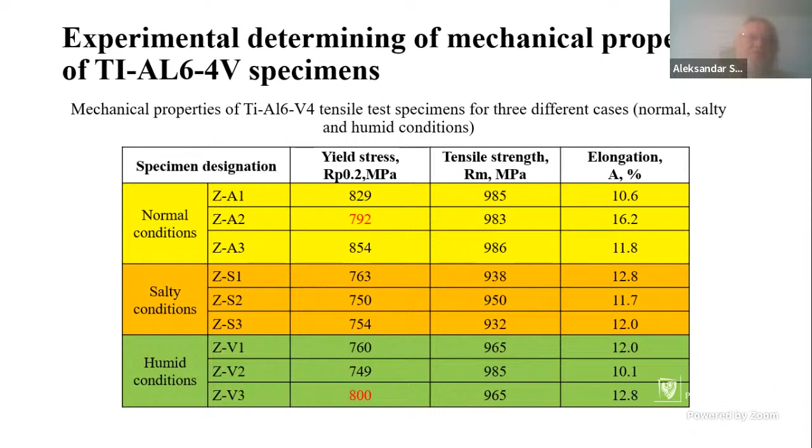And then again, for humid condition, of course, you might expect some discrepancies of results. But in any case, it's clear that normal condition has the best tensile properties, and humid condition is somewhat better than salty condition. Not a big difference, though, one should notice even at this stage.

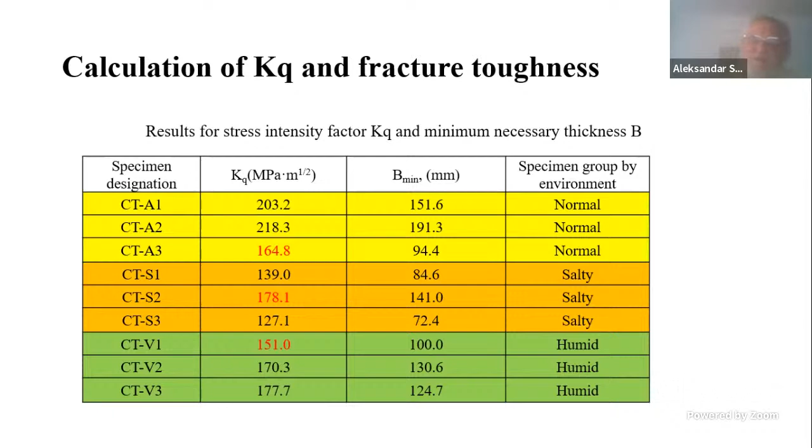In the next step, we will try to make a chamber in which we can have salty and humid conditions at the same time, but that's for future work.

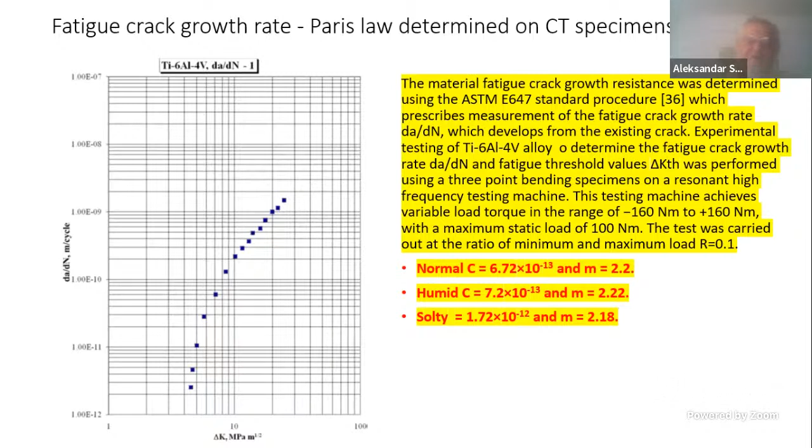Here is one of the typical results of the experiment for Paris law. It was done according to the standard procedure, and as a result we got these pairs of C and M for normal, humid, and salty conditions, again in the same order of effect. So humid is less damaging than salty.

And you will see this also by calculation. First we made an analytical calculation, just a simple analysis by directly integrating Paris law, just to have an idea of what we should expect. These results are, of course, very conservative.

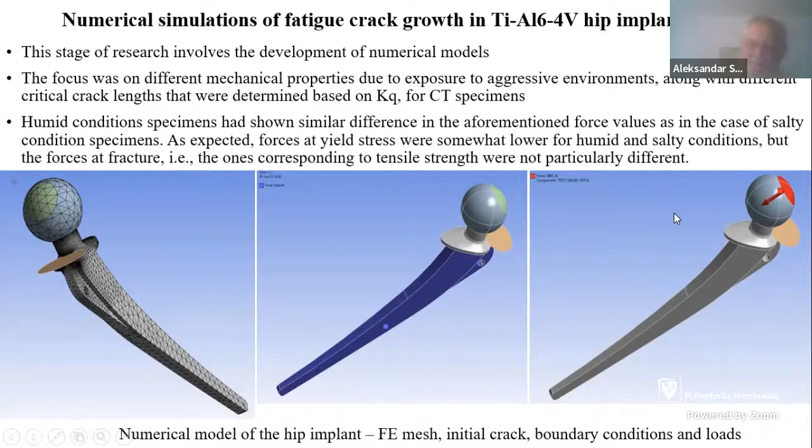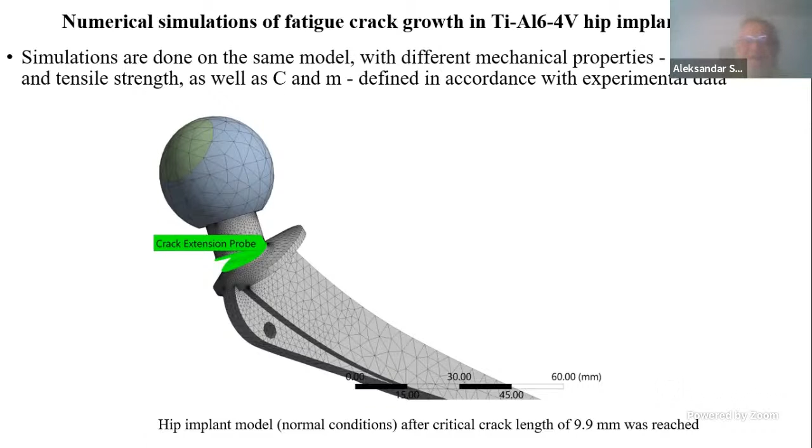Of course, the crack was positioned at the most critical location. This is well known for everybody dealing with hip implants. Here are the results, just 3 different curves for crack length versus number of cycles. We'll go quickly through that.

The second one and the third one are for the humid conditions. Once we saw these results, we can conclude that 4,869,000 is the best fatigue behavior, for normal conditions of course.

Then for humid condition, it reduces about 10% or less, to 4,450,000, and the lowest is for salty conditions, 4,135,000 cycles. So this is a much larger number in prediction than the analytical one, but the analytical one was really very conservative. So we think both of them are realistic in terms of how they were obtained.

Once again, we will try to experimentally verify this numerical simulation. It is not simple, but not as complicated as it would be with the previous case of the lug connection between wing and fuselage.

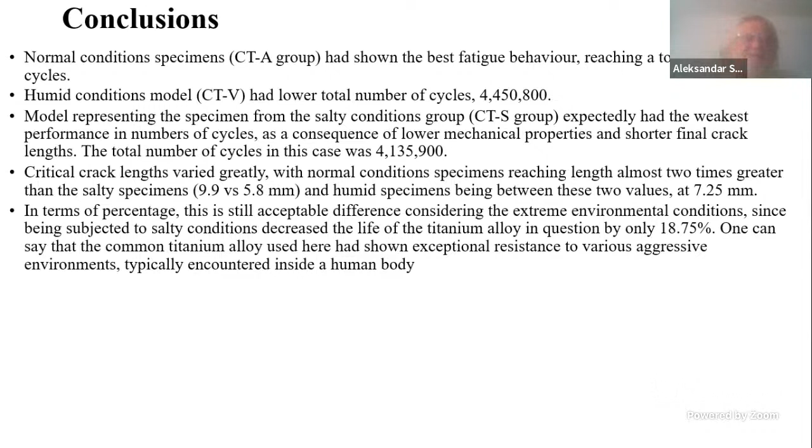So I think I'm still on time. Well, 2 minutes late, but okay. Thank you. Thank you, Alexander. Thank you very much.

I hope we won't need these hip implants in the future, but anyway, you may ask some questions or comments or discuss this problem, please. If we live long enough, everybody would need it.

So, Professor, thank you for your detailed and very interesting presentation. I would like to ask, maybe in general, a question to both presentations. Did you consider other numerical techniques for crack propagation modeling, such as the virtual crack closure technique, or just XFEM?

Not just XFEM. I mentioned that we also consider and use classical FEM because recently ANSYS provided this option by introducing the so-called SMART. I can't recall what the acronym stands for, but the last T is for technique, I know that. SMART means that the mesh automatically follows crack growth.

So the software itself allows you to use FEM and not be forced to use XFEM.